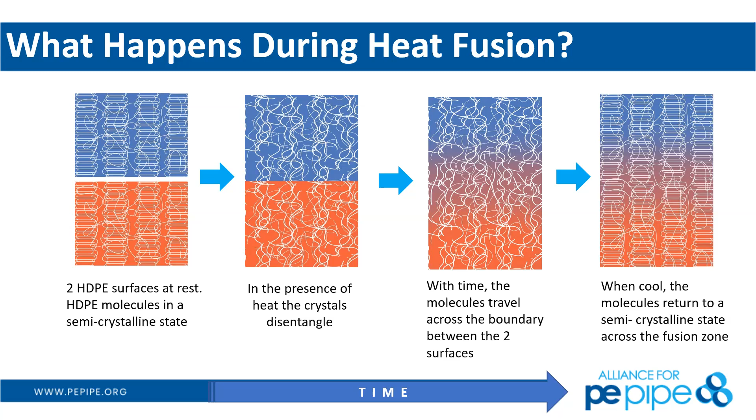So this is why we have a monolithic system. In these pulls and trenchless situations, we really don't have a so-called joint - it's monolithic, just one continuous run of pipe. So the strength of the pipe becomes a solid single-type strength for that pipe.

Here's an example of it. If you want to talk over the video for us.

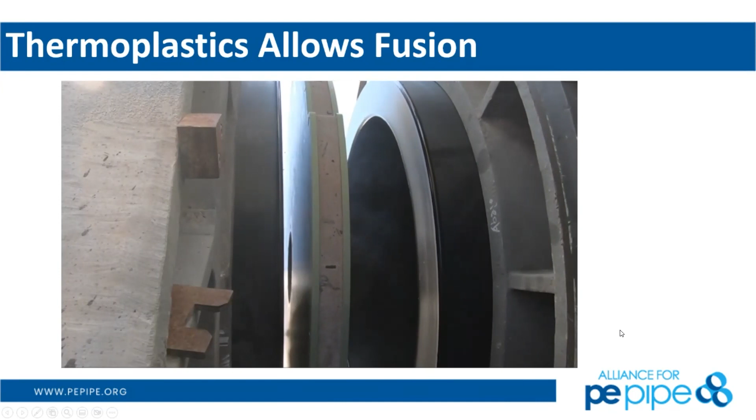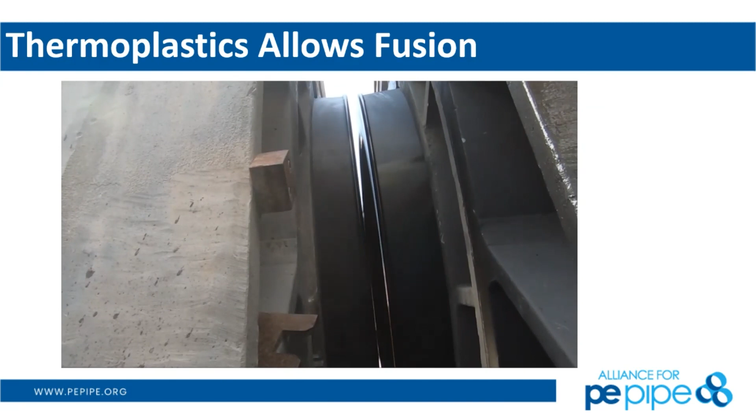Yeah, you bet. So this is opening, the heater plate's going to come out. You see a little bit of smoke there, but that's okay. The surfaces are very smooth, the heat beads are very nice and even all the way around, and we're going to push that together, and you're going to see the rollback. If you saw any kind of concave surface, you'd stop that process, because that means it was heated under pressure, pushing material away from the cushion of the molten interfaces. As you can see now, the bead is very even all the way around - that's an indicator that rollback and the pressures being used are acceptable for that joint.

That was shot, Alan, at Fort Lauderdale, when we helped the utility save the day when they were in an unplanned manner flooding the Intracoastal Waterway with sewage. So polyethylene saved the day, and that's where I got that image.

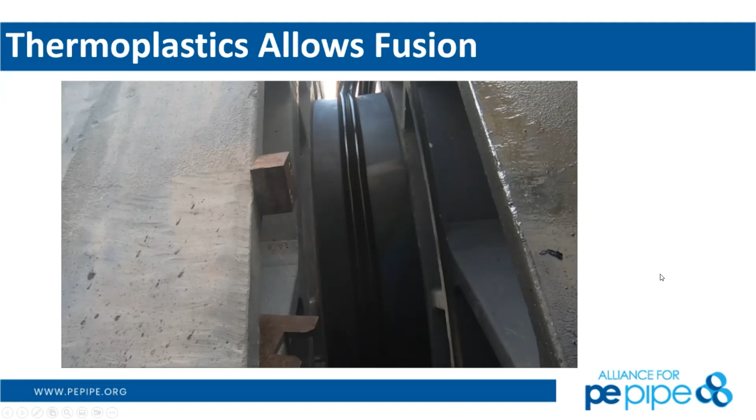Gotcha, it didn't take Pete long to pop back on with a comment. That's perfect. So this process is repeatable, and out in the field if you get to an oops or something of that nature, you don't necessarily have to use another fitting - you can just go right straight back through and change that.

One of the characteristics that's always the most amazing to me, Richard, is the changing viscoelastic behavior. When we load this pipe with a duration of loading, we change the apparent modulus of elasticity, and that gives us some of the ruggedness and durability we like to see when installing the pipe. Go ahead and tell us a little bit about that.

Yeah, so this is one of the areas I get a lot of questions on, because it's misunderstood in terms of how long it's supposed to last. But when you're pulling a pipe through a trenchless situation, an HDD situation, or even a slip lining situation, you have to understand what its resistance is, so you don't pull that pipe apart.

You have to ask yourself, is it an instantaneous response like an H20 load? Then you would use 150,000 PSI to evaluate that resistance to collapse or any kind of deflection of that pipe. But as you're pulling it through, you might say, I want this pipe under this load to last 50 years, and we would actually punish ourselves in terms of the modulus and use a much lower number to understand the collapse aspects there too.

So we really truly understand not only short-term response to installation, but also long-term response for the trench and the depths that you're putting that pipe in. And even for the Miami job that you're going to see on video, I believe that was 45 feet deep. There's some loads there that you have to take into consideration, so you want those long-term factors.

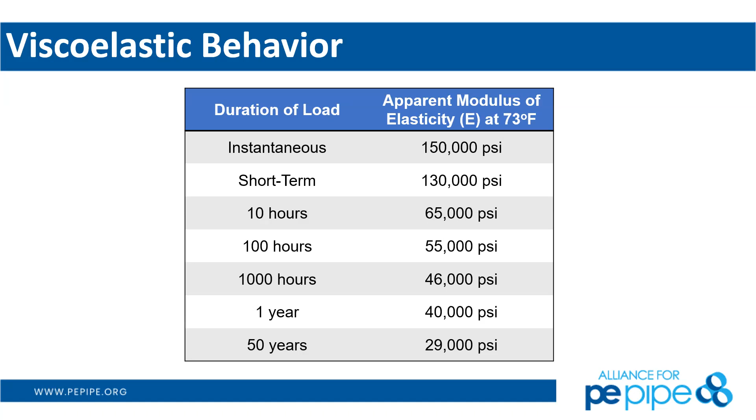HDPE does have one of the most forgiving allowable bending radius of all pipe material. Interestingly enough, in pipe bursting and in horizontal directional drill, the limiter becomes the drill string more so than the actual allowable bending radius of the high density polyethylene pipe.

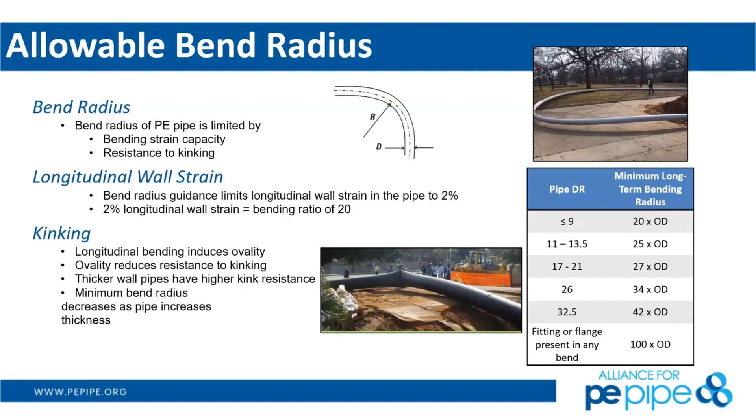When we get to thinner wall pipe, the DR is inverted, so a higher number is a thinner wall or a weaker pipe. We can overstress that pipe, which is what you'll see in this middle picture of kinking this actual pipe. What the contractor did in this scenario is go beyond that allowable bending radius, so they'll simply cut it out and re-fuse that pipe to protect the bending radius. So Pete loves this video we got here as well.

This is someone that really trusts the viscoelastic behavior of high density polyethylene, taking their Ferrari or Corvette or whatever that might be underneath that high density polyethylene pipe as we go through.

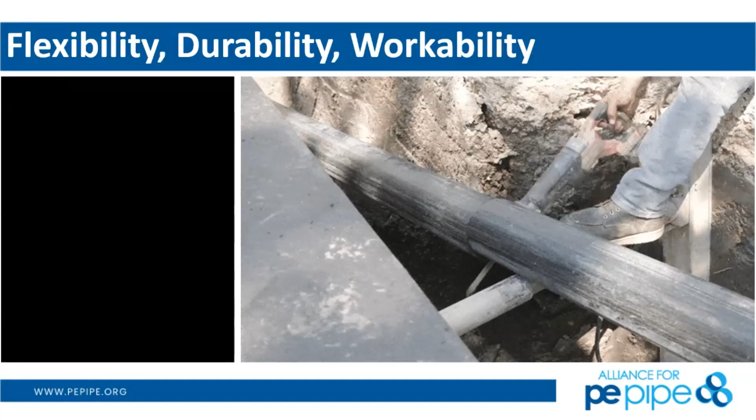So the fusion process that we spent a few minutes talking about shows when we are making these cuts of the pipe in the field, it's very easy to work with it with a dry chainsaw or a sawzall, as you're seeing here, and then they will simply fuse that connection back to where they need it to go.

So Nick, we'll go ahead and pull you on to talk about horizontal directional drill as we go through and really launch into the most popular trenchless method for installation.

Exactly. So when we talk about trenchless, as the name implies, it really is going to be any method to install pipe or duct beneath some type of surface obstruction to reduce disturbance. That may be a roadway, a river, or a railroad. And one of the most common methods out there right now is horizontal directional drilling, also known as HDD.

So we use HDD a lot with HDPE pipe. It's a good marriage for all types of applications, including water, wastewater, as well as duct for both fiber and electric. Common drill paths with HDPE generally range, depending on pipe size, anywhere from about 400 feet up to about 3,500 feet. Common pipe sizes range from about 2 inches up to 36 inches, but there are exceptions.

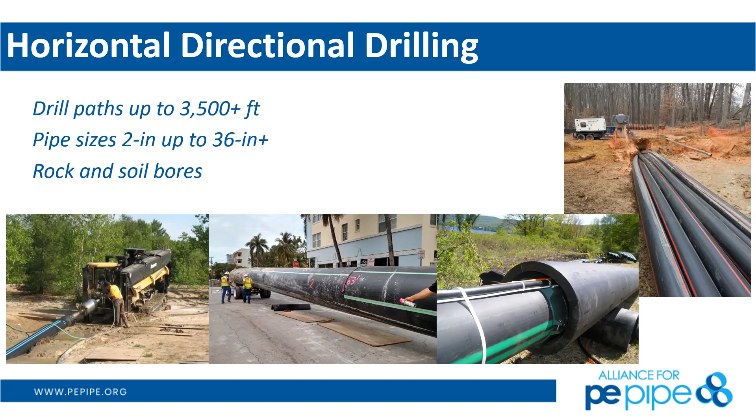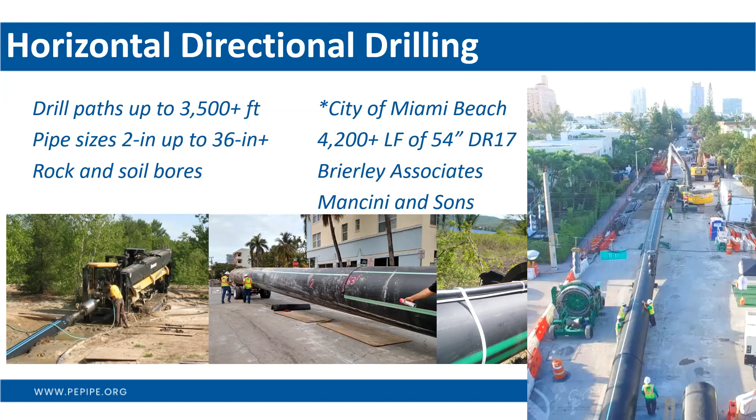The picture in the middle of the slide shows a 54-inch diameter HDPE pipe that we designed for Dave Mancini and Sons for the city of Miami Beach. Really big pipe — we actually have footage floating around of a drone flying through this pipe. 54-inch DR17 with a total length of about 4,200 feet.

So we're going to show a couple of slides depicting the HDD process. These are slides and schematics generated by Mears Group. It's really a 3-part process.

The first stage involves advancing a small diameter pilot hole from an entry pit to an exit pit. This part of the installation is carefully designed in advance to accommodate the bending capabilities of the drill rods and the product pipe which will be pulled into the hole, as well as the subsurface conditions. During piloting, the driller monitors the location of the bit at all times using either a walkover wand or, for larger installations, more commonly a downhole steering tool connected to the ground surface through wire lines within the drill rod.

Once we have the pilot geometry established, the contractor enlarges the hole through a series of push or pull reaming passes to the desired finished diameter, usually about 12 inches larger than the product diameter for bigger pipe or bundles. Once the hole is fully enlarged and prepared, the contractor attaches the product pipe or bundle to a swivel and pulls it back into the borehole, ideally as quickly as possible. In most cases we want the pipe or bundle fully assembled at the exit to minimize downtime, realizing that stopping the pull adds some risk of hole collapse and getting the pipe bound.

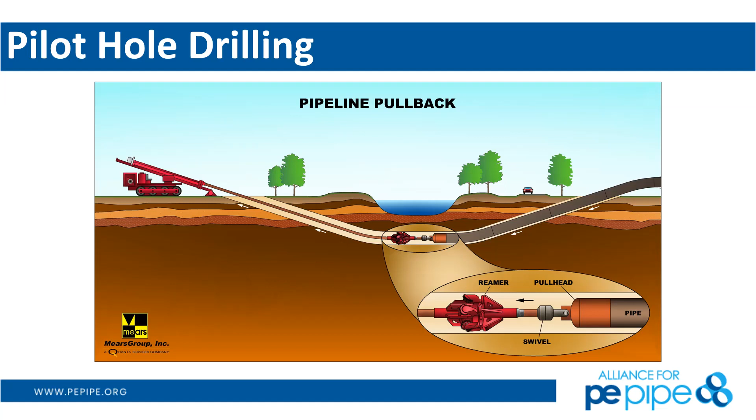So we look at our typical HDD design. There are a number of common geometric components we can see in this schematic. In a very simple form, we're looking at and considering an entry angle, an exit angle, a total depth, and then the radius of curvature in our entry arc and exit arc, and possibly in the horizontal.

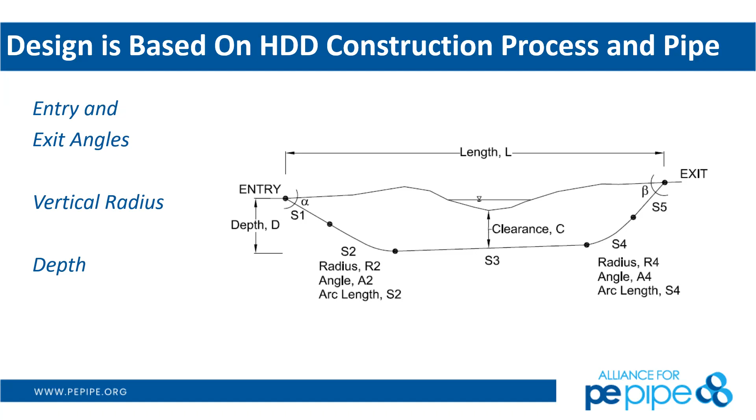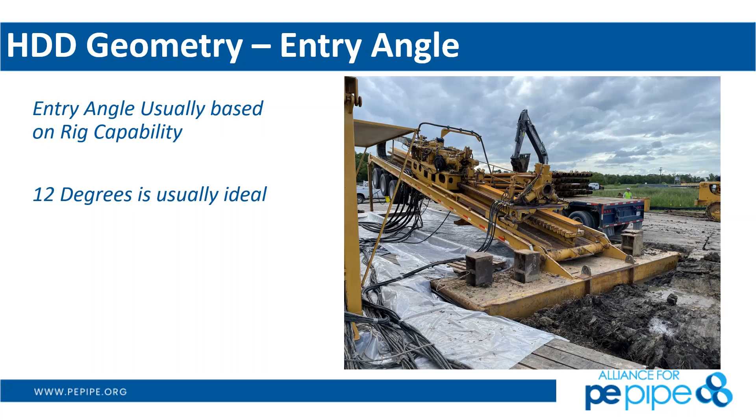For the entry angle, people often ask how steep can I enter the ground. It's really driven and controlled by the drill rig. Most rigs are not set up to drill any steeper than, depending on the rig, anywhere from 18 to maybe 22 degrees. So the most common entry angles we use are usually about 12, 14, and 16 degrees.

On the exit side, the exit angle tends to be softer than even that. Even though we can exit steeper, the steeper we exit, the more difficult it is to manage the product pipe, which has to be directed and guided into the borehole. Typical exit angles range from 8 to 10 degrees, maybe 12 degrees. You can imagine if we were dealing with a steel pipe, as in the center photo, it can be very tricky to handle that pipe and direct it into the borehole without damaging the pipe or overstressing the steel. One of the nice things about HDPE is it's very forgiving, as Alan mentioned. It's very flexible, and usually requires less equipment and process to manage it into the borehole.

So Nick, some of the most common failures we see are trying to achieve a very deep depth as quickly as possible. I think the entrance and exit angle limitations explain why that's not possible, because the equipment simply can't traverse that depth that quickly. That's one of the most common causes of design problems we see, overestimating how quickly you can get down to depth.

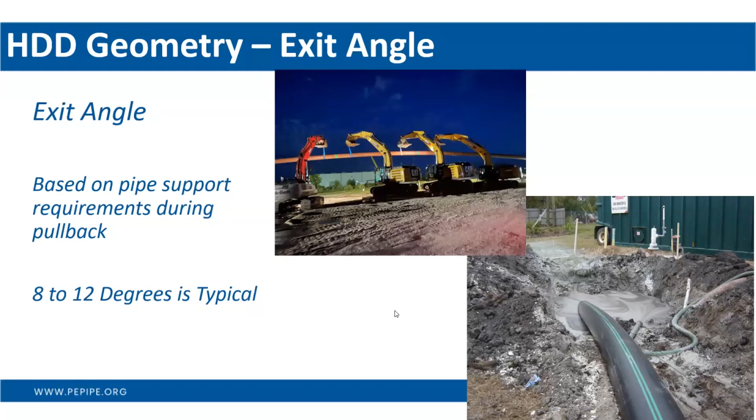Is that correct? Absolutely. We'll look at some drill steel limitations here in a second, realizing that yes, maybe you want to get down to 40 feet over a short distance, but with these limitations it's going to take you some time to do that, since we can't have a super steep exit or entry angle. In terms of the radius of curvature, getting into what's going to control that.

With any HDD project, we need to think about how tight we can bend in the vertical and horizontal, and that's going to be governed by either the drill pipe or the product pipe. All HDD drill steel is designed to bend, as you can see on the right. This is drill steel at the ground surface, and the bending capabilities will depend on the steel itself, and it'll vary by manufacturer.

Maybe you've got a drill rod with a minimum radius of say 400 feet. You don't want to bend it any tighter than that, because you run the risk of breaking the pipe off. We also have to think about the product pipe. If we're dealing with a steel pipe, it may be much more onerous in terms of the limiting bending capabilities. In a lot of cases with a steel pipe or steel casing, that will govern the minimum radius.

One of the nice things about HDPE is that it's very flexible, and in almost all projects it's not going to be your limiting factor in terms of minimum radius. The minimum radius for HDPE is typically going to be the drill steel.

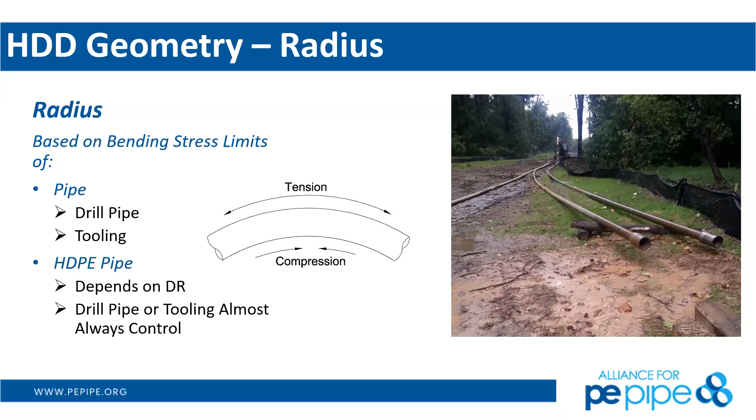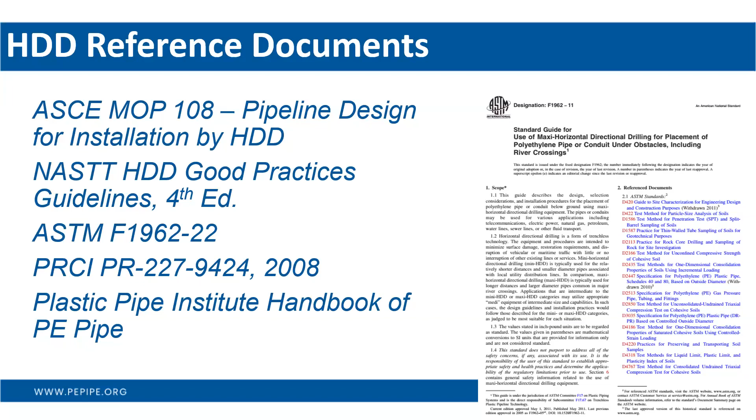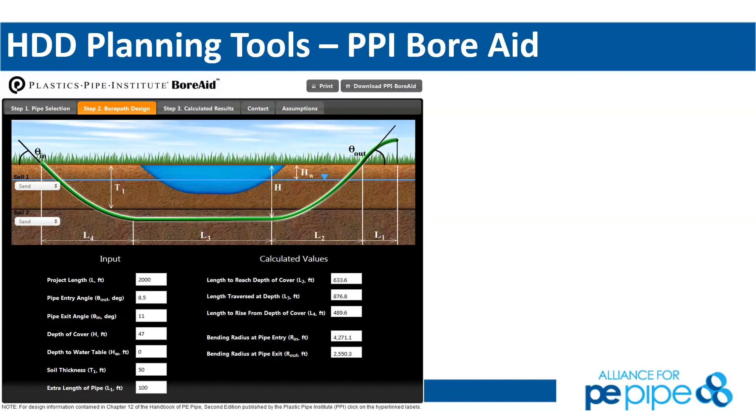So, to tell you more about the tools available to you, PPI has a bore aid calculator online that you can take a look at. You could put preliminary project design parameters into this calculator, say at a 30% conceptual level, laying out where you think a drill might go to see if it's feasible. It will calculate all the different values for different sizes of pipes and lengths, and see if they'll withstand some of the pulling forces.

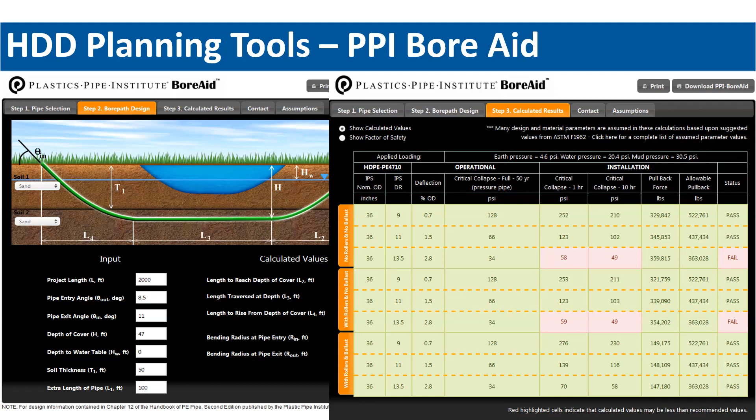Of course, this is a 30% planning level document. Beyond that, you need to look to somebody like Nick to do your design, or if you have competent engineers on site, they'll go through the iterations as well. The Alliance does have calculators available, but we want to know more about your project before turning you loose on those, to make sure our engineers on staff can give you some good guidance. So here's a little bit more from Nick.

One of the things we really need to understand when planning and designing a directional drill is related to the subsurface conditions and geotechnical parameters. The first thing we'll do is start evaluating what we think we're dealing with in terms of regional geology, looking at available references, what we're dealing with in terms of soil types and thickness, depth to bedrock, and groundwater. Then we'll go out into the field and complete site-specific subsurface investigations, and collect samples for laboratory testing, which will help develop geotechnical parameters for detailed design.

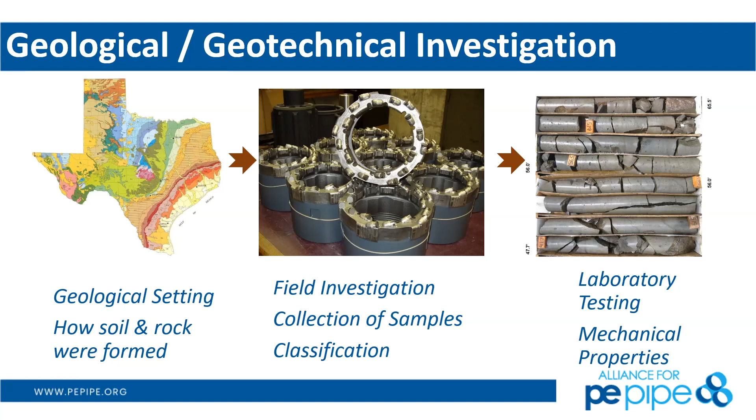The most common exploration for directional drilling, because of the depth, will be sample test borings. On land, we'll do these with truck-mounted or bombardier-mounted rigs. Over water, if the depth and current allows, we'll do these with barge-mounted rigs. We commonly want a test boring at our HDD entry and exit, and then we typically will space these out along the alignment, depending on access and subsurface conditions, at a spacing of about 400 to 700 feet. The test borings want to be drilled to at least our bore depth and beyond, in case it needs to be lowered during design or construction.

In soil, we'll typically sample every 5 feet using split spoons and/or undisturbed tubes in cohesive soils. If we encounter bedrock, we can definitely drill in bedrock, but we want to sample that and know where it is, with good laboratory testing. We core that, and then grout the test borings when they're done. We always save the samples through construction.

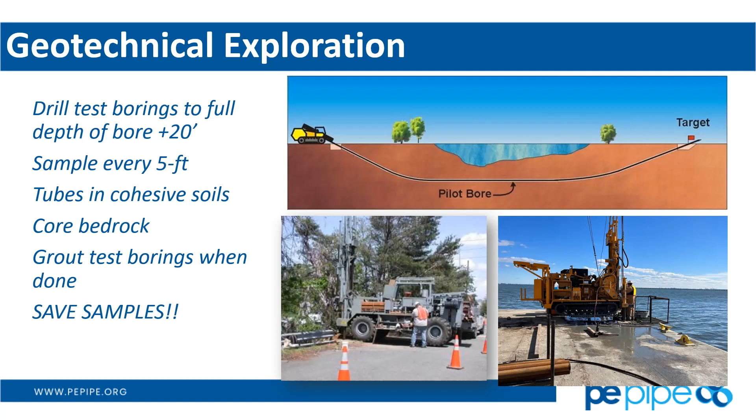Nick, another quick question: can you combine the horizontal and vertical alignment changes for drilling operations? Can you repeat the question? Can you combine the horizontal and vertical alignment changes for a drilling operation?

So if you want to move up or down or left to right as you're drilling through the path, can you use both of those directional changes in a single drill? Yeah, if we're talking about directional drilling itself, you can, but usually we want to be turning and steering in one dimension and not both at the same time. You usually want to avoid a compound curve.

But yes, you can steer vertically as well as horizontally. In terms of subsurface characterization, we're really looking for a lot of detail so we can understand our penetration rates, what we need for drill tools, the cost of the bore, schedule, and the potential for risk.

We want to know the depth of the fill, which can contain obstructions. We need to know the soil gradation—are we dealing with clay, silt, sand, or gravel? What's the density of the materials? I want to know the formation type—is it a glacial till or a glacial lake deposit? Because this will dictate ultimately the gradation and the behavior.

We need to know the potential for obstructions, such as cobbles and boulders. What's our depth to water? How permeable are the soil and bedrock formations we're dealing with?

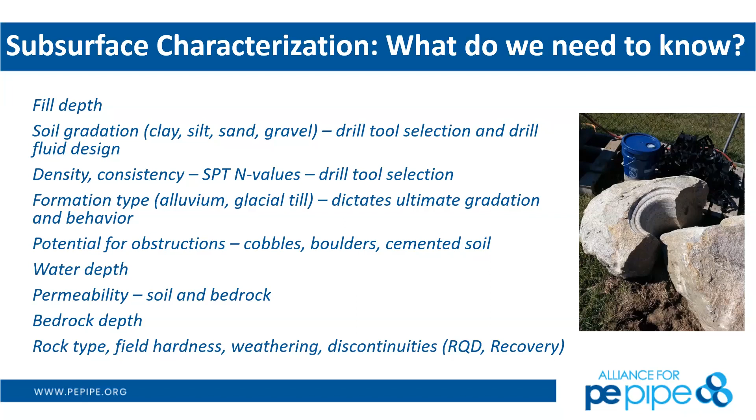Lab testing—once we have our test borings done, we'll submit samples for testing to further characterize and develop parameters for design. Most commonly, sieve and hydrometer testing for grain size, unit weight testing. If we have clay soils, cohesive soils, we'll be running strength testing. And on bedrock, we definitely want to do some compressive strength testing and Cerchar abrasivity.

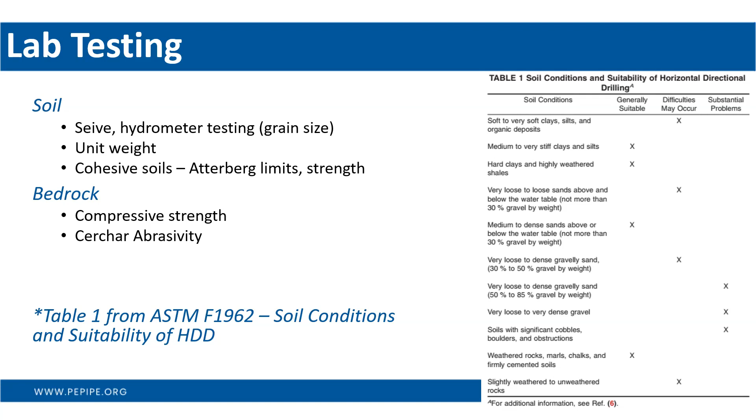Once we have all our information from background research and test borings, we'll start putting together an interpretive geologic profile, which will help us optimize our HDD geometry, specifically intended to reduce our risk of frac out, reduce our risk of encountering obstructions or materials which may give us trouble, such as shallow bedrock, cobbles and boulders, or clean gravel.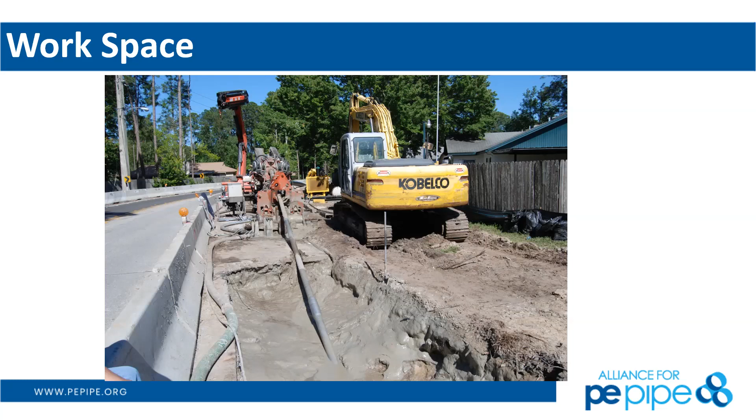On the exit side, we're going to need room for a pit, pipe handling equipment, and the product pipe. It's very important, if at all possible, to have the product pipe or duct fully assembled and laid out, ready for pullback once the borehole is done. You can assemble and fuse pipe as you pull it back, but that results in more risk of getting the pipe bound. So if we have a 1,000-foot long bore, ideally we want 1,000 feet of pipe fully assembled, tested, and ready to go in the borehole.

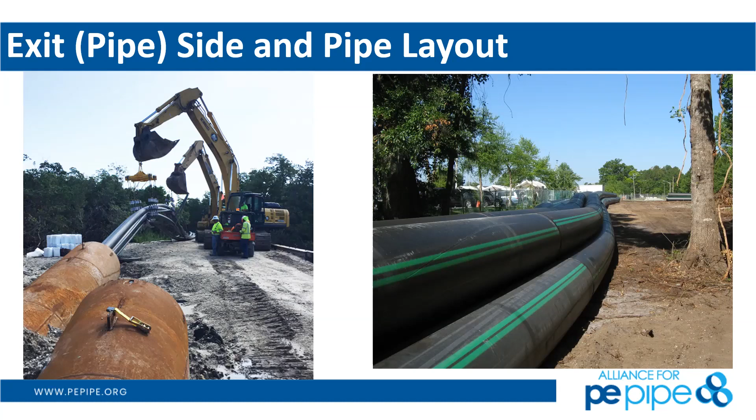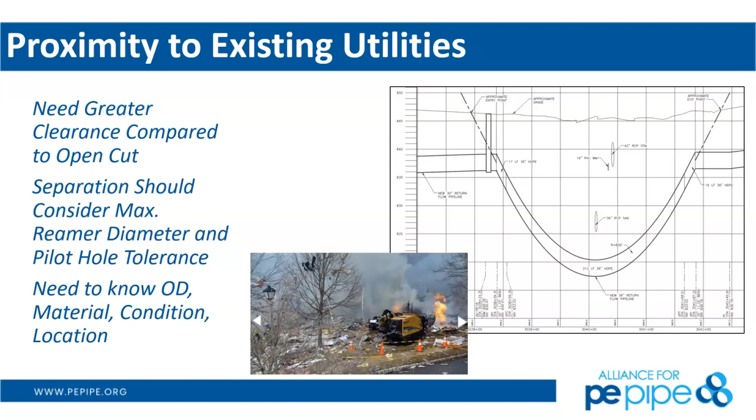Another thing to be aware of is existing utilities. As with any trenchless project, we want to know where the utilities are in advance so we can design around them to avoid them and minimize the risk of unnecessary utility strikes. This involves more than just the utility one call—we're talking about record research as well as soft dig confirmation prior to drilling. The photograph in the middle of the slide shows an HDD rig which has unfortunately encountered and struck a high pressure gas main. So we definitely need to characterize and know where the utilities are prior to construction.

Some specific risk considerations for HDD. Every trenchless method has risk, and HDD is no different. One of the most common risks is inadvertent release of fluid, or a frac out. This is a situation where the drill fluid exits the borehole and gets to the ground surface or a water body. We'll talk more about that in a second.

Other potential sources of risk may include heave or subsidence if we're dealing with a road or railroad. Clean gravel can be problematic, can be difficult to support and can be difficult to get out of the borehole. Soft clay can restrict the borehole. Hard bedrock can be problematic in terms of penetration rates. Abrasive conditions in soil or bedrock can result in premature wear of tooling. Geologic transitions, if we're going back and forth from materials with dramatically different gradation or densities, can present challenges in terms of lots and lots of drill tool changes, as well as risk to the drill rods, bits, and reamers, which can also result in risk of tooling failure.

So as I'm looking at this slide and your explanation, Nick, it summarizes why we go through the whole process during design to identify these geological scenarios. Change along that bore path obviously needs to be understood by the contractor doing that work. We've had a lot of great questions about this concept as well, and it sounds from personal experience that encountering these conditions in the field is really one of the best opportunities to learn from something. There's nothing like learning from failure. But when we do these webinars, it's sometimes easier to learn from somebody else's failures. That's why we try to help as much as possible.

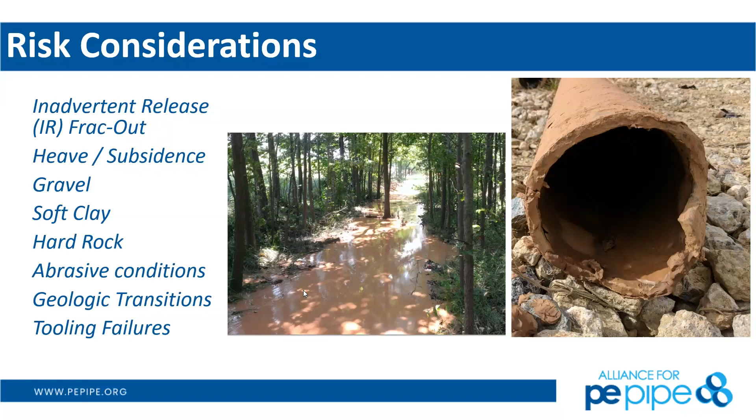So specific to HDD is the risk of frac out, or an IR. This is, again, a situation where the drill fluid suddenly exits the borehole and reaches the ground surface or a water body. It's important to understand that with directional drilling, there's always a risk of frac out. We can't completely eliminate that risk. We need to understand why it happens.

As I mentioned before, we're always pumping drill fluid down the center of the rod out into the borehole, and then that's traveling back up to our entry pit or exit pit, which helps remove the cuttings. But it does put pressure on the surrounding ground, whether soil or bedrock. We have a dynamic pressure from the pumps as well as a static pressure based on the weight of the drill fluid. If that exceeds the confining capability of the ground, we can start to lose that fluid to the surrounding formation.

So as part of the design process, standard of practice is, again, to develop a detailed geologic profile, estimate what the downhole annular pressure should be for a given geometry, and then compare this to the estimated confining capacity of the surrounding ground using a number of different models. An example is shown on the right. There are a number of commonly accepted models to do this: the Delft equation, Queen's equation, and we also use total stress. None of these are perfect models. It's really a matter of understanding the relative risk, where we think the risk may be, to get a feeling for what the contractor needs to plan for relative to potentially repairing the borehole or cleaning up an IR during construction.

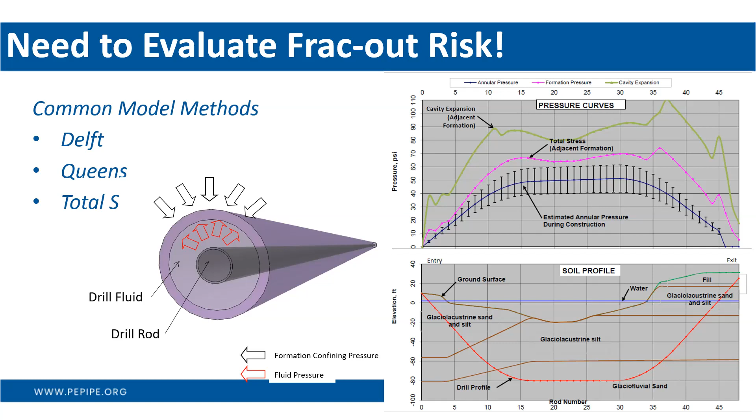So in terms of risk mitigation, I'll finish with this. We always want to make sure we're designing within the standard of practice, using appropriate design references, and always want to have good geotechnical characterization in advance to understand what we're dealing with, and if at all possible, design to avoid that risk, whether it's cobbles or boulders, potentially problematic bedrock, or clean gravel. The design should address the geotechnical risk, should make an effort to understand the risk of IR, and make sure the contractor and the permitting agency are aware of that. We need to think about the potential risk to the tooling as well as the product pipe.

HDPE, as well as any other product pipe, is going to have a limit in terms of the pull force and the buckling potential. During the design process, we also want to understand what the anticipated pull load is going to be, so we can select the appropriate pipe, as well as what the external loads are going to be.

And we also want to think about the risk to the surrounding structures, whether pavement, utilities, or railroads, for instance.

Great job. I'd like to close with one question. A participant asked, Nick, should relief holes be used to control frac-outs in unintended locations?

They can be. We've had situations where it does make sense to pre-drill holes to allow the drill fluid to escape, provided you can get to those and manage it. We've also had situations where once a frac-out begins to happen, it makes sense to let it bleed and control it, and you know where it's happening. So it can be. Like any other trenchless project or geotechnical situation, you're also assuming it's going to flow where you want it to go. So sometimes they work, sometimes they don't.

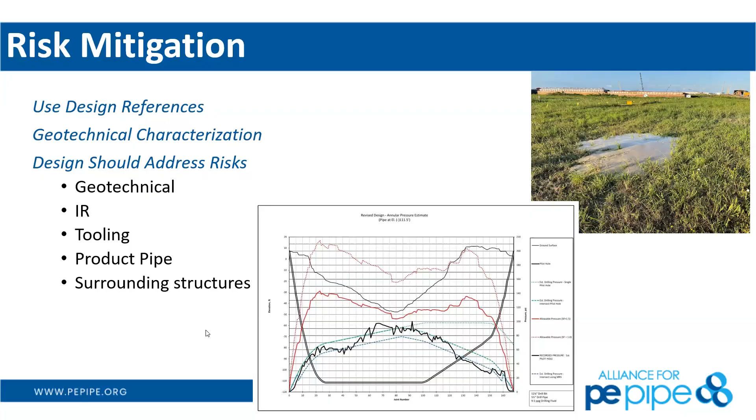Now we're going to talk about slip lining. Alan Ambler, take it away. All right, so slip lining is another trenchless technology.

What we are doing is taking advantage of the fact that we have an existing conduit, properly preparing that pipe to receive the new pipe, and essentially using that to protect the replacement pipe as we go through. So some key points we want to look at: we don't want any obstructions within that existing pipe or conduit that would preclude us from being able to pull in a brand new pipe.

So we do evaluate the integrity of the host pipe, because there's an option of having a semi-structural liner versus a structural liner. The difference is the DR rating of the pipe we're pulling back into place. And we are limited in our ability to pull through bends, so those are spots where we'd have an excavation to make sure we pull through that location. Richard, yes, you'd like to add something?

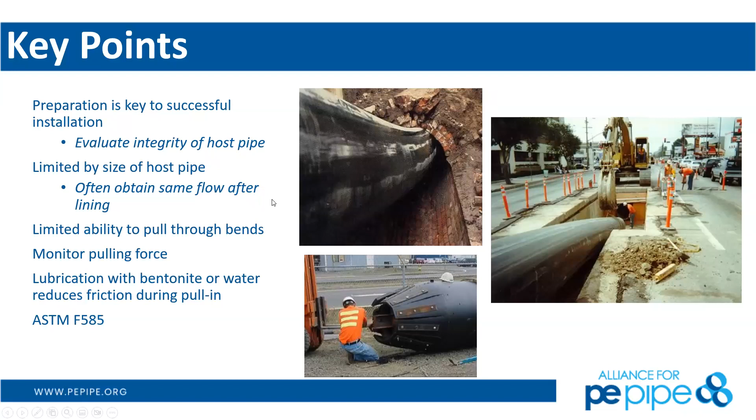Can you tell us what's happening in the video on the right here, Richard? I think you're familiar with that video. Yeah, that was in Miami, just on the other side of the international airport.

There was a whole bunch of sewer rehabilitation there. But the interesting thing about this one was the hoe in the back usually uses a strap to pull that pipe into the existing line. But as we started to push it from the back, it went in quite a bit faster. So I asked the engineer, is there any obstructions in that existing line? He said no. I said, just push it in. Took him literally 3.5 minutes to push in about 250 feet of pipe. So it was awesome. And that's 54-inch diameter, by the way. So it helped that process quite a bit.

So properly preparing the pipe, making sure the excavations to access the pipe are shored properly to give us that preparation, and then fusing that long run in advance is going to give us some major productivity improvements as we're looking through it.

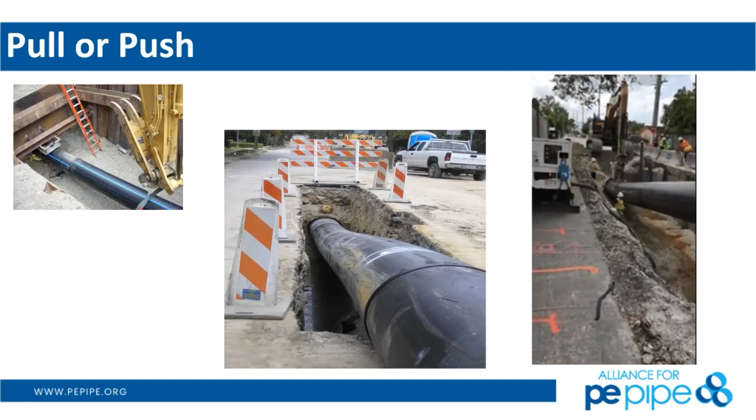Compressive fit lining is another type of lining that actually only uses high density polyethylene.

What we do with compressive fit lining is we'll take a larger OD of a high density polyethylene pipe and put it through either a series of rollers or a die, reducing it to a smaller OD, pull it into that existing pipeline, and then allow that high density polyethylene to naturally relax and force up against that interior surface of that pipe. So yes, preparation is key on all this. This really takes advantage of that viscoelastic behavior of high density polyethylene that we talked about previously.

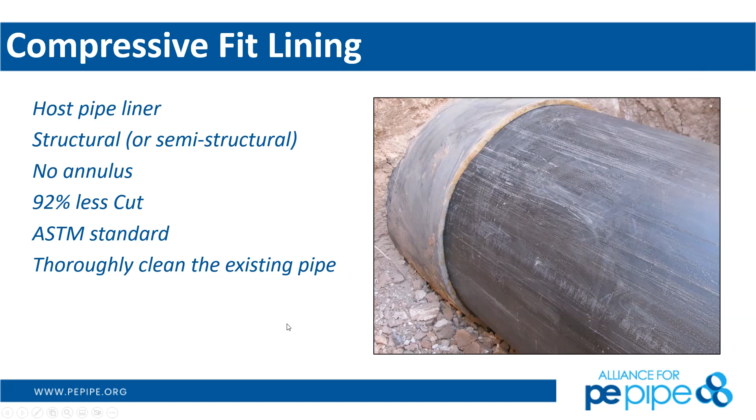So from slip lining to compressive fit, this is quite a bit different, but the same. These particular annuluses that make people uncomfortable or engineers uncomfortable, that's a very common question: well, do I have to fill in that annulus? And the answer is really no.

If you've got exposure to huge temperature changes at the front and back end of, let's say, a 1,000-foot tunnel, and that space is in there, that pipe can float around in that empty space. I know that top loading, if it's H20 type situations, are there, but if you're confident in your existing pipeline that's casing that liner, that's great. But if you're not, then you can fill it with grout, and there's no issues filling it with grout—grout cures at a little bit higher temperature, but we don't see any negative effects with grouting polyethylene. Whereas the compression fit will eliminate that annular space altogether.

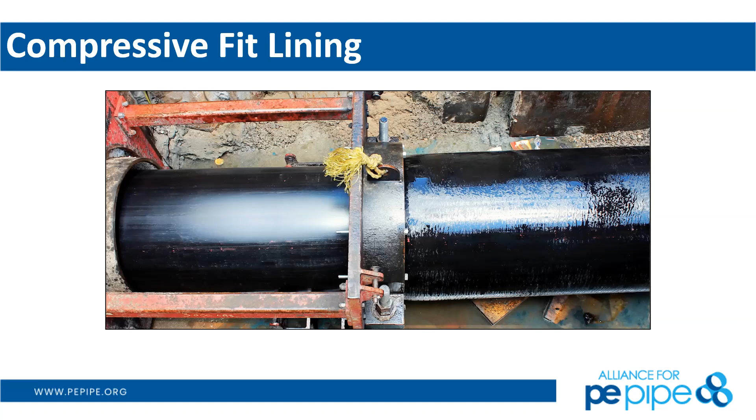Here's a good schematic of what we're looking at. A 32-inch pipe is now becoming a 29-inch HDPE pipe under tension. This is a project in New Orleans. And then now we're pulling that through that existing pipeline, taking advantage of those molecular properties of HDPE.

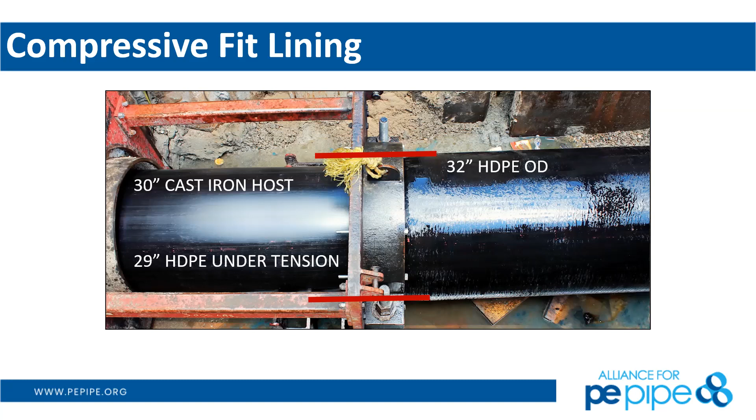In a wonderful manner—most of the time when I talk about slip lining with engineers, they are conservative and they always ask, how can we get the largest ID of the replacement pipe if you're not going to pipe burst it? And this is how you would do that.

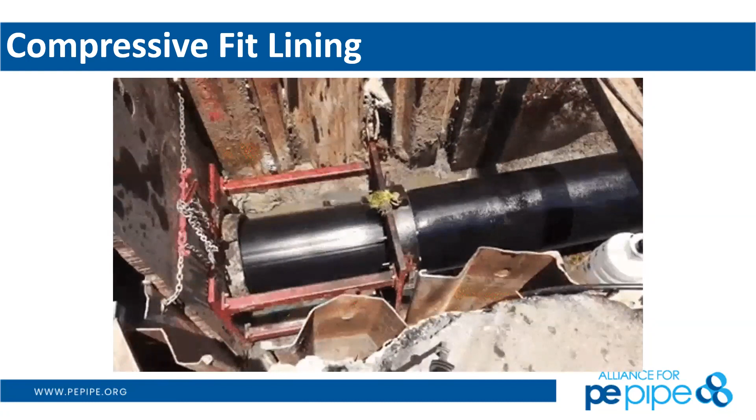So here's a video of it. Now the forces that are required at the ends where this die is very specifically are heavier than what you would see in a normal slip lining process, and in some instances even heavier than a pipe bursting process, because we're forcibly pushing that HDPE pipe through that die. So you would pour concrete or otherwise heavily reinforce the interface of the soil at that location to make sure that we're not pushing that die through the soil column as we go through.

So here's Rusty, you want to come on and talk about some final connections and what Core & Main can possibly show us for how we would connect this to other pipe materials or high density polyethylene in the intermediate.

You bet. Yeah, it's always key to be able to do these tie-ins, particularly on these trenchless projects, but you even have it with others, even with repairs. We actually have a full line of in-ditch fusion equipment—that's always going to be my first choice. Fusion for polyethylene is the number one connection that you want to try to use. We have machines that you either take the carriage off and can drop it down, or this particular photo is showing a specialty in-ditch machine, and we can go up to 63-inch on those, and we have those in stock for rental or to have us come out and do the job.

But the next thing would be possibly an electrofusion coupler. That's always a good backup as well, and is basically just hooked up to a smaller box. You manipulate the pipe into the coupler, making sure it's centered and properly prepared, which would take some scraping and that type of thing. And then you just cook that coupler, and it will do the same thing and give you a good joint. So there's a variety of things you can do—there's some mechanical as well, but in my book, fusion's always going to be number one, electrofusion two, and mechanical coupling after that.

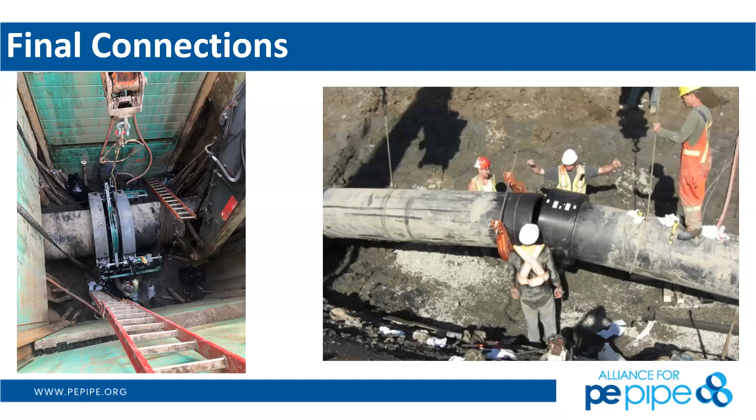Exactly, absolutely. Wonderful. Now we'll talk about pipe bursting, which I've done quite a bit of in my time and experience. There's two primary types of pipe bursting. Pipe bursting is the only trenchless technology rehabilitation method that can put a larger OD pipe back into place. Everything else is going to have a constricted ID, even cured in place pipe lining or spray epoxies. But pneumatic pipe bursting only uses high density polyethylene, because it takes an impact hammer and inches it along that pipe, and that constant motion and stress is absorbed by the high density polyethylene with no detriment to that pipe material.

Static pipe bursting can be primarily used for water, where you could seal off the ends of the pipe and nothing goes through it. And pneumatic pipe bursting, an air compressor pumps through an air hose, delivery hose to the interface right at the impact hammer as it goes through.

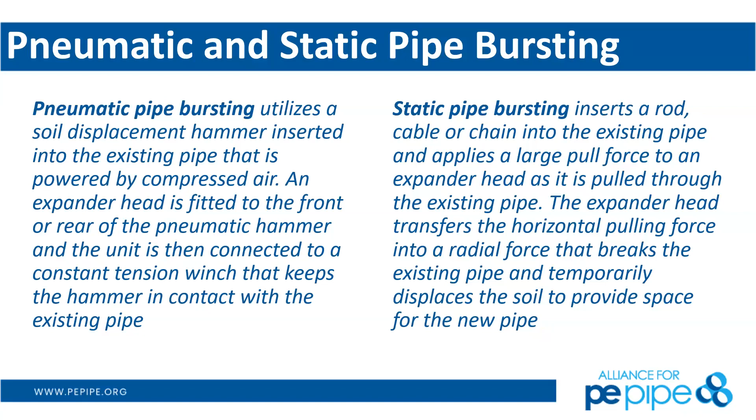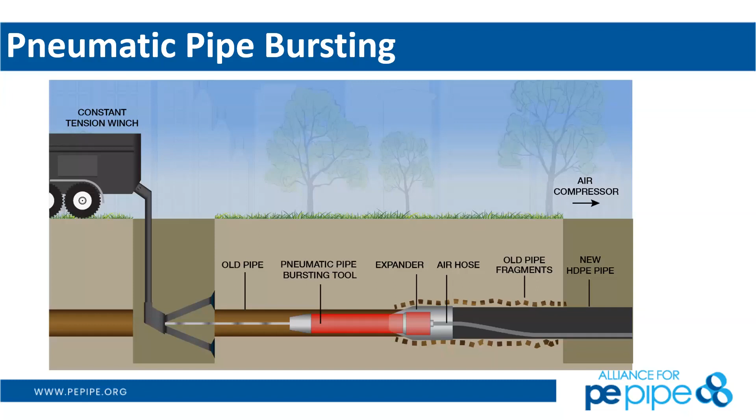So here's a schematic itself of pneumatic pipe bursting. We are using a constant tension cable winch to be able to make sure that the impact hammer face and the expander head is aligned with the existing pipeline, and then it just inches through as we go forward through that.

Here's a couple of images of fixing an expander head to high-density polyethylene. It is robust enough that they simply just screw those screws into the side of the high-density polyethylene, and that expander head grabs on into the high-density polyethylene itself. After they've made the pull, then they'll over pull and cut the section off. It's very common to see it.

In this particular image, you'll see a lubrication port on the side as well. They were expecting excessive friction along this pull, and lubrication, similar to a bentonite, can be used to be able to make sure you reduce those friction forces as we go.

Richard asks: any problem with bursting AC pipe? That's a great question.

Asbestos cement pipe can be burst under existing regulations. It is legal. Now, the people that are tasked with enforcement vary throughout the country, and good messaging needs to be provided if they are otherwise unfamiliar with AC pipe bursting.

Most of the guidance has been given for vertical construction instead of buried asbestos cement pipe. So they are bursting in state of Florida, Michigan, Texas, and even in the heart of environmental country with the Bay Area Air Quality Management District. My company, Trenchless, has helped make sure to facilitate that. If you need a primer on AC, way more than that, definitely email me and we'll provide that contact for you.

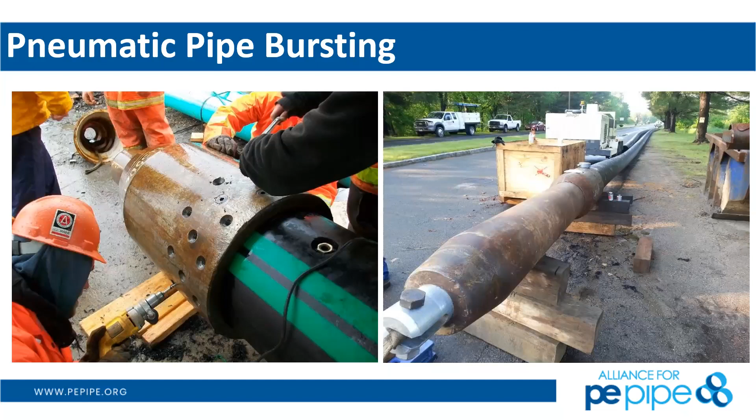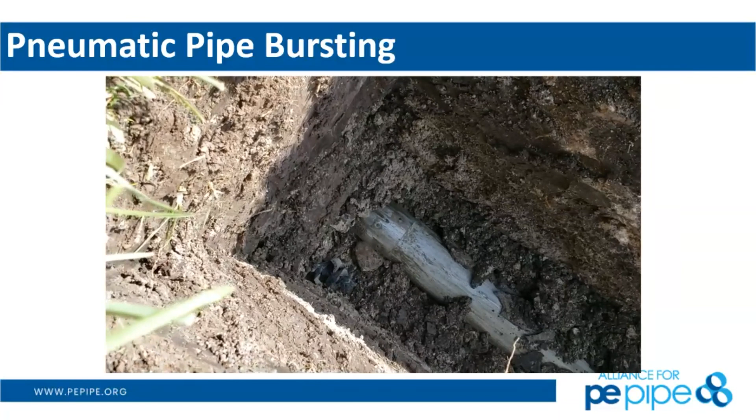Here's a video simply on an advance, and you can hear the knock as it goes through of an impact hammer coming through a pre-dug excavation for service connections. That's all it is, just inching along as it moves through that, pushing that pipe into the 2 to 3 inches of soil surrounding that replacement pipe.

So here's static pipe bursting. The change in how we deliver the force is the only difference. We're using a hydraulic power pack to pull through a static bursting unit and that series of rods as you go through.

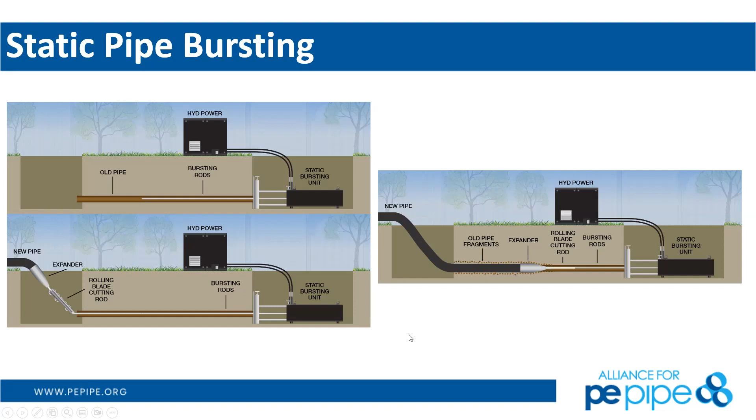So here's an advance clip of high density polyethylene replacing asbestos cement pipe. See, we are making sure that it's wet and all the fibers stay suppressed as it goes through the excavation. And you'll see an extraction cage here to remove the tooling and equipment on the face of the pipe bursting expander head in that manner as well.

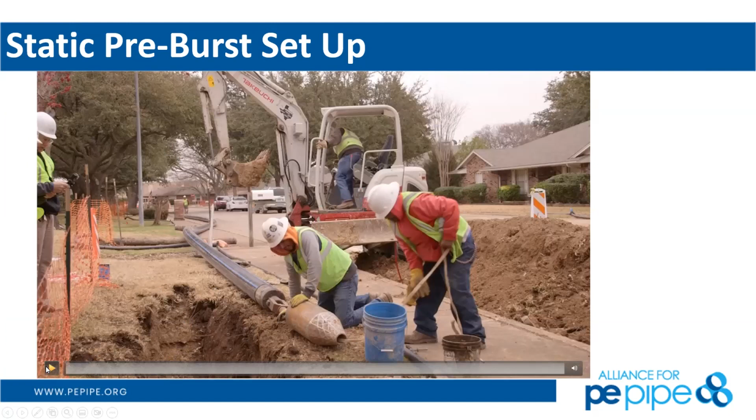Here's an additional video that I'll talk through, basically of fixing that expander head onto the pipe bursting or high density polyethylene. This is done with a swivel rig instead, and you'll see that you have a series of cutters on top of it. Once that excavation is done, we'll make sure to put it in the hole to be able to come through and perform that pipe bursting rig.

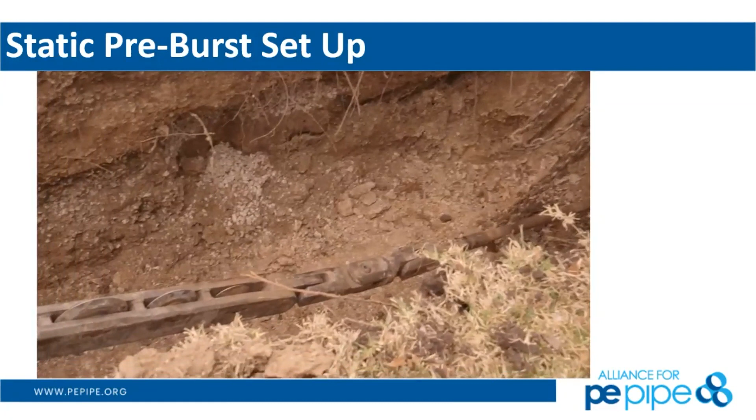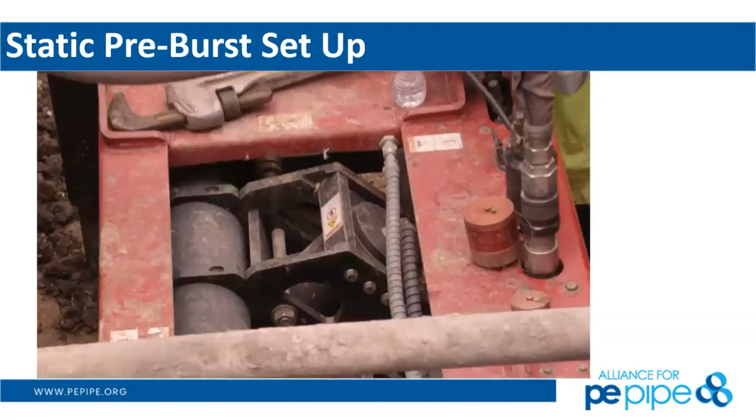Now we'll see, I liken the excavations required for shallower, existing pipe as surgical excavation in urban and suburban areas. Now we'll get through on a 1,000-foot run. If you have that much to go through, you'll excavate the valves and the service connections. A 1,000-foot run, you can actually minimize your excavations to about 40 feet.

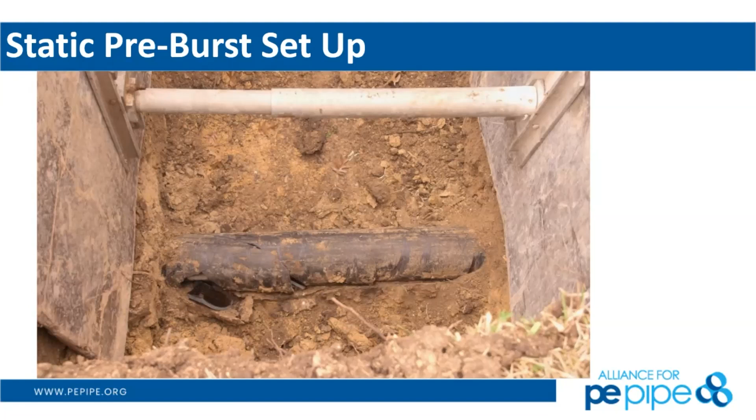So when we talk about 85% less trench, that's what we're really doing. Here's examples of pipes that can be burst.

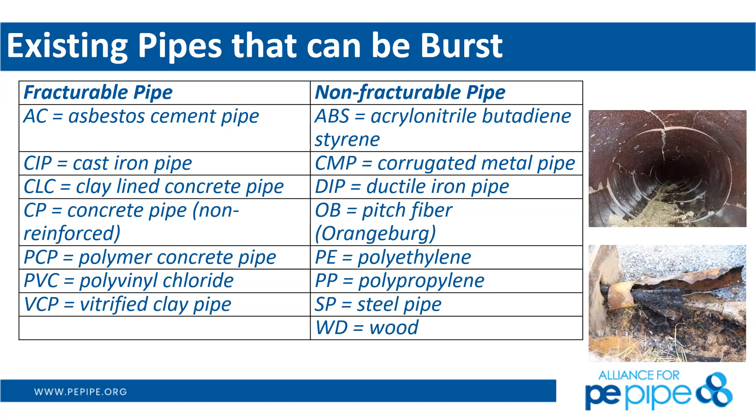It cannot be burst if we're going to have a pre-stressed concrete cylinder pipe or some other type of reinforcing through it. Every day of the week, clay VCP pipe is burst. Cast iron pipe is burst. Now, when we get into ductile iron or corrugated metal pipe, it's a bit harder to go through that process.

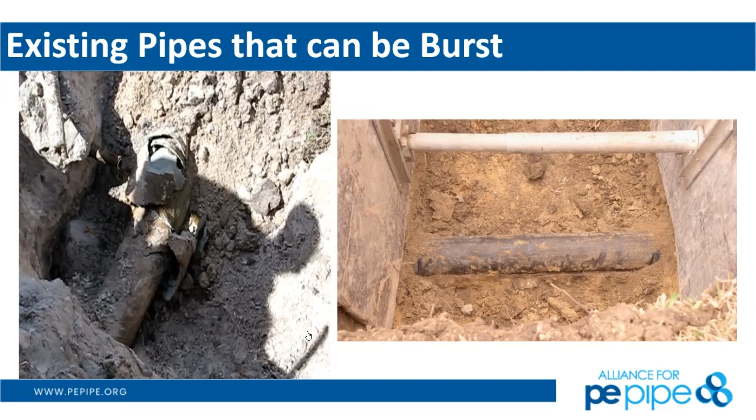Yes, Richard. Just another quick question for steel pipes, we can use a special cutter, correct? If need be, and it's not really bursting, it's cutting it? Yes, those are pieces done in advance of a static rig and in advance of the expander head.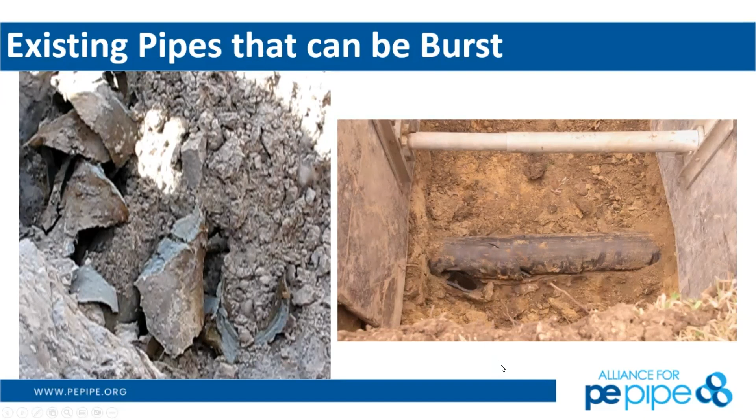What you're seeing here on the left video is just AC pipe fragments that stay within the soil surrounding it. And what you'll see on the right here now becomes cast iron as it's burst through. In static pipe bursting, we can put slitters, as Richard mentioned, or cutters or other things that'll shear the existing pipeline as we go through it and move along.

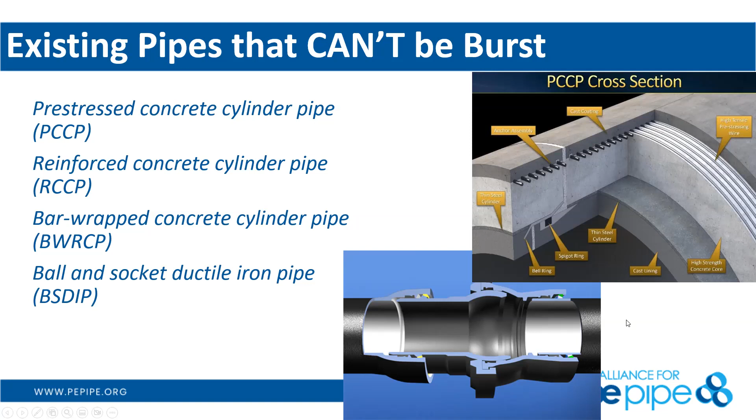So here's a pre-stressed concrete cylinder pipe. So when we get that typical cross section of the pipe that has a bunch of reinforcing in it to resist both compression and tension, now we won't be able to cut through this material to be able to burst it. That's when we compressive fit line it or slip line it as we go through.

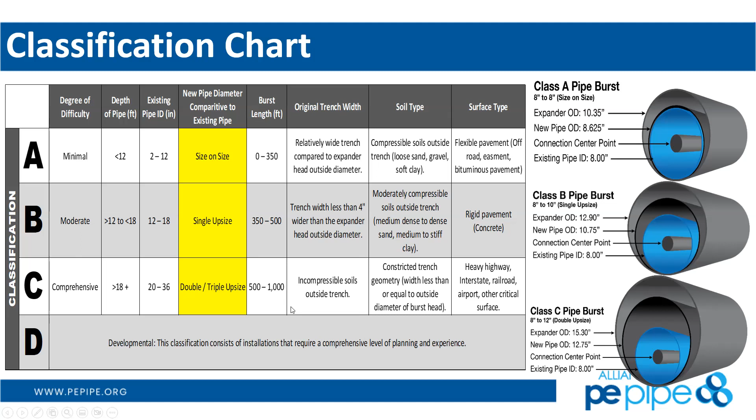Here's a classification chart put forth by the International Pipe Bursting Association. It shows degree of complexity as we go through developmental projects such as the ductile iron pipe or the corrugated metal pipe that I talked about. There's excess risk in that needs to be shared with the contractor, and they will determine whether or not they feel up to being able to perform that type of pipe bursting project.

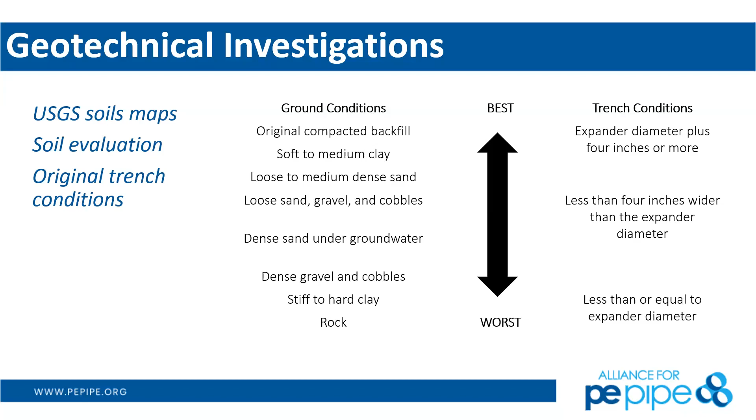Now, since we are taking advantage of a proven conduit location, we know it's generally free and clear of third-party utility conflicts. What we want to look for is the existing trench condition, if it's the diameter and then some of the pipe to allow that expander head to go through, or if that existing trench was excavated on rock or stiff to hard clays. Those are going to make it so most of the expansion forces go up, or we are not going to be able to push the expander through that as well.

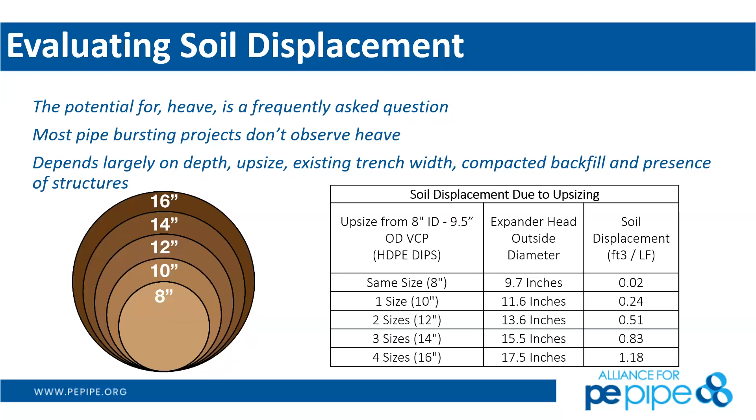Here's some soil displacement as we look. Here is simply just taking a 4 size upsize, so that's 16 inches from the original 8 inches. And as you can tell, we are displacing quite a bit of soil in that manner as we see here. So this is important for high density polyethylene.

The industry itself has tables of safe pulling stress. So that's important when we compare friction along a horizontal directional drill, or if we want to try to estimate friction forces in pipe bursting, which is actually a fairly challenging thing to do. If you're interested in that, make sure you look at our more advanced pipe bursting webinar to talk through some of those points.

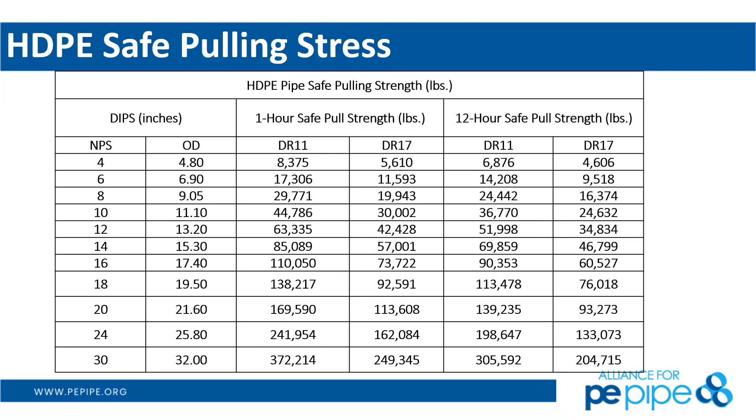But this varies because the viscoelastic or modulus of elasticity of that pipe varies with time. So I'm showing you a 1 hour safe pull stress and a 12-hour safe pull stress based on DR11 or 17 in various pipe sizes. So we would look at that to make sure we gauge our safe pulling stress.

So an interesting thing about taking advantage of that third party, existing conduit is being free from third party utility conflicts, and we generally have a good path already established. Therefore, in some instances, when we share risk, the owner understands the process. We can take advantage of a little less design work up front. This is a key difference between horizontal directional drill and pipe bursting.

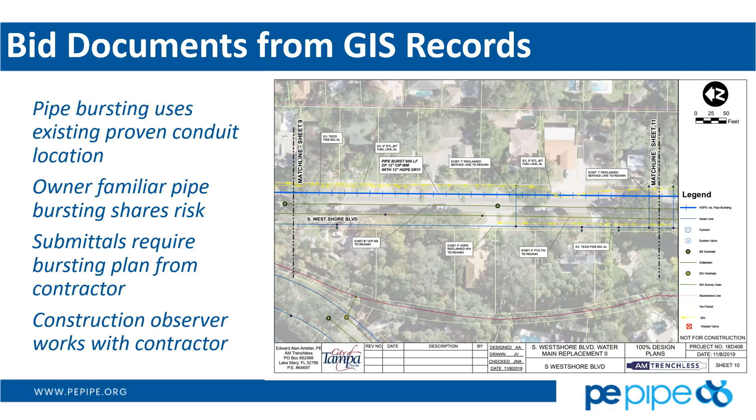In fact, I've designed over 42 miles of pipe bursting projects from GIS records itself. Part of that is to require a burst plan from the contractor to show that they've thought through the process required to burst the project and have good construction observation on the opposite side.

So high density polyethylene does have a gouge allowance that if you gouge 10% or less of the pipe wall thickness, then it operates with a normal life. So that 10% can be hard to guesstimate through it.

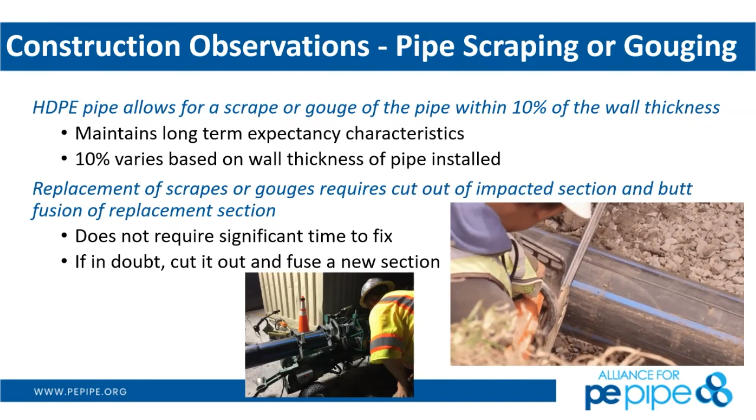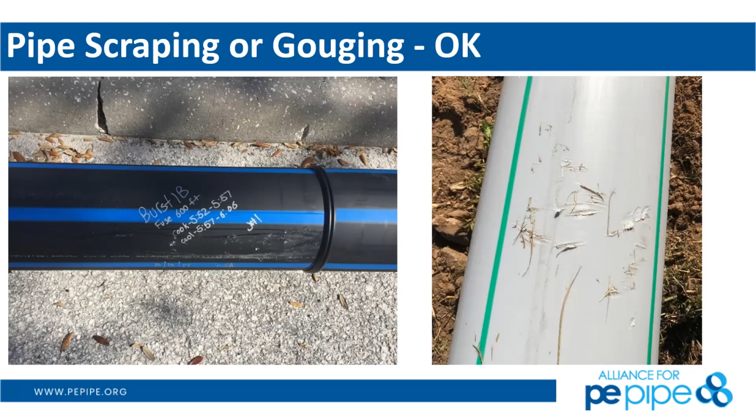So I say, when in doubt, cut it out. We'll show you some examples here. Pipe scraping or gouging, that is okay. These are just surface scrapes that are pulled along a roadway to move it from the laydown yard to the actual pipe insertion pit location as it's sent. I didn't have an example of a bad gouge, but that would be obvious, 10% or more of that wall thickness.

Again, when in doubt, cut it out. In many instances, that foreman doing the pipe bursting project can easily make that connection, cut it out, and then re-fuse that location in under 30 minutes, depending upon the DR and the size of the pipe.

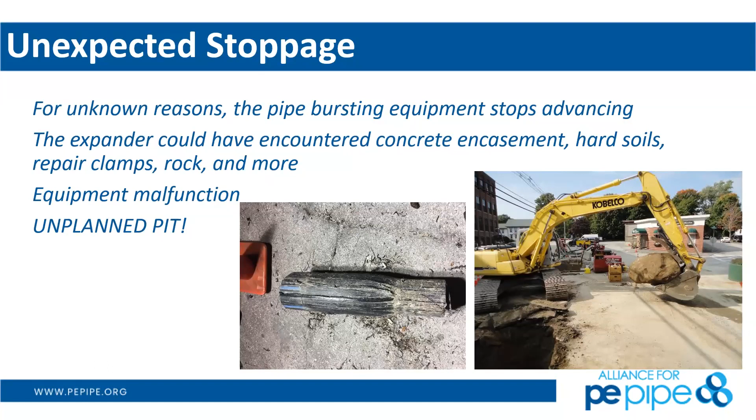So every pipe bursting superintendent out there knows they may have to dig an unplanned pit. They're already aware of that. These are two instances where the swivel head itself malfunctioned. This swivel head was used too many times in the left photograph, or they found a very large boulder, in which case the pipe bursting equipment simply isn't going to push that away, and it becomes another excavation point. Pete, you want to come on and talk about the data logger pretty quick?

Sure. Great job, Alan. As far as risk mitigation goes, Alan and I were thinking the data logger, what a great opportunity to control the downside. That is, what are those fusion techs doing when the inspector's not available, not paying attention, not there, or you've only got one site visit a week? What's going on those other 4 days? The data logger can keep track of what's going on with fusions when no one else is around.